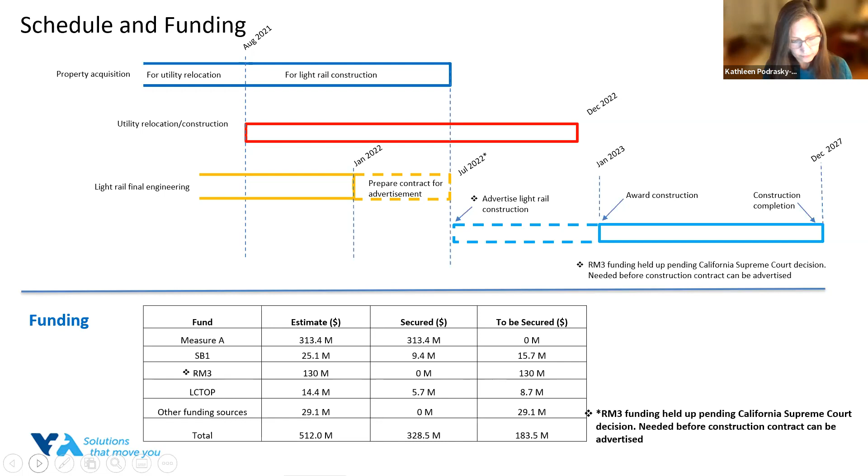This is work to be done by PG&E and San Jose Water Company. We have several communication companies like AT&T, MCI, Comcast, Crown Castle, and Zayo planning to relocate for this project. PG&E is taking the lead in working on the joint trench, which is a combination of utilities that goes into one trench. This makes it more efficient, maximizes productivity, and also minimizes impacts. PG&E is coordinating with other utilities to do this joint trench, where other conduits would share a trench. It's in the design right now, and very soon it'll be out for construction.

Like I said earlier, the final engineering is complete. We are getting the contract package ready for advertisement, and our target is to have this ready by July of 2022. You'll probably see an asterisk there—this is because we need about 130 million of RM3 funds, something we mentioned in previous meetings, that is held up in the California Supreme Court. We're hoping there will be some kind of decision by then, but we don't control the schedule of the court. As soon as we have a decision, only then can we advertise this project—that's why you see an asterisk there.

So we'll be ready with the contract package, and as soon as we hear a decision from the California Supreme Court, we will proceed with advertising the project and then construction. As far as the funding, it's estimated to be 512 million, and we still have to secure about $183 million for the project to proceed with construction.

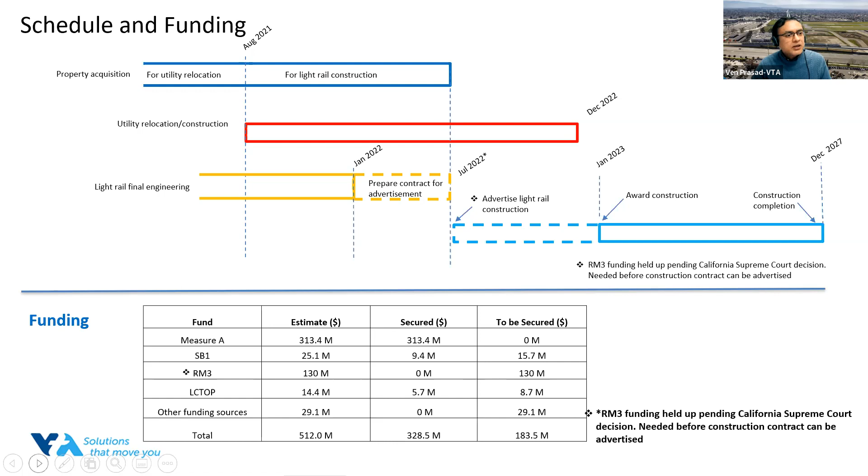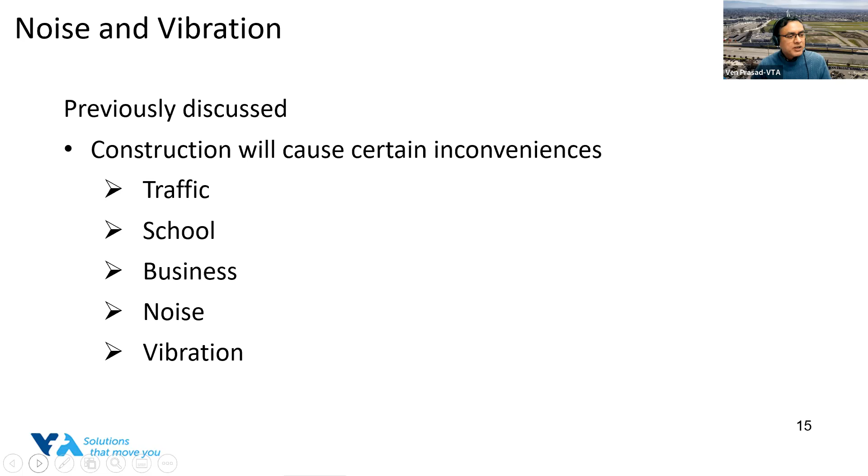Next slide, please. In the previous meetings, the last 3 or 4 meetings, we've been covering many topics of interest to the public, the traveling public, and the neighborhood. We covered traffic before, we covered schools, business, noise, and vibration. The last couple of meetings we covered in detail noise and vibration, the mitigation, and what we've done and are planning to address during construction. These are all things we shared with you, and we're hoping you would share that with your group and let them be informed.

Next slide, please. In the previous meeting, I talked to you about both noise and vibration and the criteria that's been established, and who's responsible for establishing the criteria. We follow the Federal Transit Administration, or FTA's, criteria for managing construction and construction-related noise. A thorough analysis was done as part of the environmental document, which is on our website, covering the analysis done for noise and vibration.

These are the mitigations we're going to be following during construction. Our goal is to minimize the impact, whether it's traffic, noise, or vibration. We want to make it as little a problem as possible. So that is our goal, and we are working to have those impacts minimized.

In the last meeting, you may remember these maps we shared with you. What you see in red are all the readings there. These are called PPVs, or peak particle velocity. FTA has a criteria.

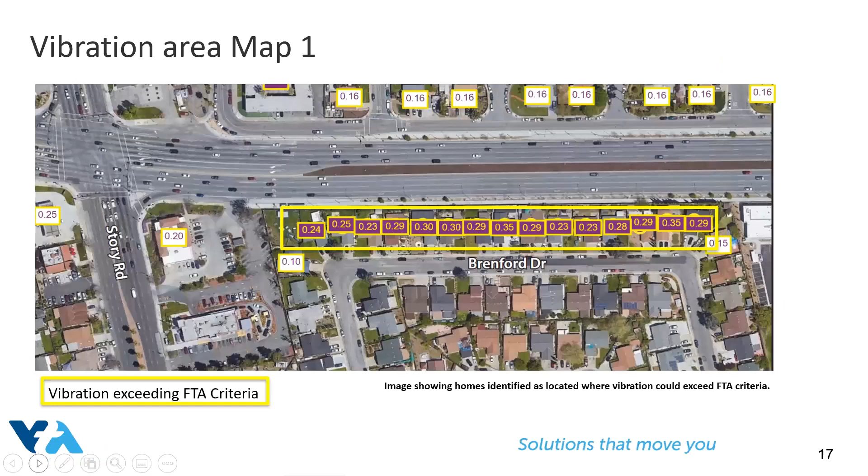Where is that location on the left? I don't recognize it right away. Is that Swift or something like that? Yes, it's at Swift and Capitol Expressway.

Now, one thing I want to point out is I don't know what this gentleman in the hole was doing. I see the little shoring right there, but he's on his knees in a hole that's probably 8 feet deep, and 1 cubic yard of dirt falling on him would suffocate him. So I would hope you guys would make sure your contractors have complete shoring around these trenches.

I don't think that's enough. That cubic yard weighs as much as a car, according to OSHA, and you guys will never get them out of there in time. Do you see what I'm saying? I'm just telling you, I have OSHA 10, OSHA 30, OSHA 500 training. I could teach safety, and as far as I'm concerned, that guy's looking to die.

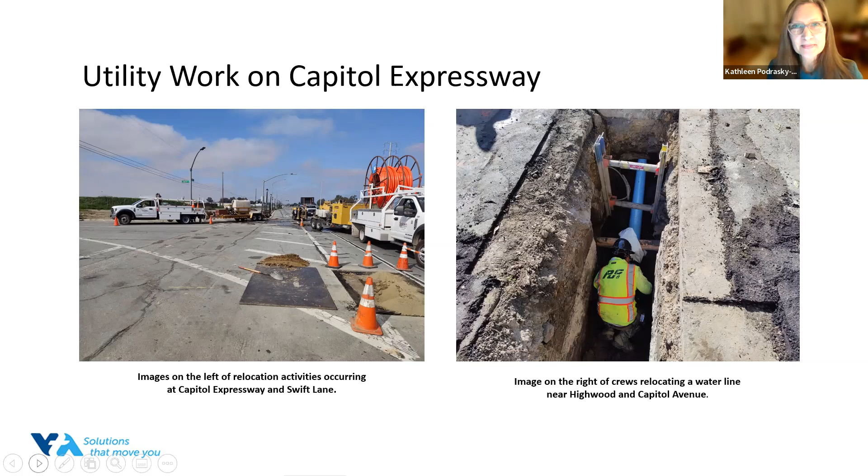Sandy, let me unmute you, unless you can unmute yourself. Kathleen, I wanted to ask, will all the nearby residents get a postcard notifying them about the upcoming meetings, especially the ones that are Spanish speaking? Yes, once we get the dates nailed down, I'll notify about both dates on one notice.

It will be translated. I will be reaching out to all of you to also help broadcast it and reach out to your network, but definitely it will be mailed. I know that's really important for a lot of the neighborhoods that don't have internet, Nextdoor, but it will also be on the website, I'll do the Nextdoor posting and the stakeholder posting, but definitely it will be mailed. Okay, thank you.

You bet. I'm looking forward to getting that nailed down, the date nailed down and the facilitator online, and it's going to be a neat, fun experience. It's a fun part of the project.

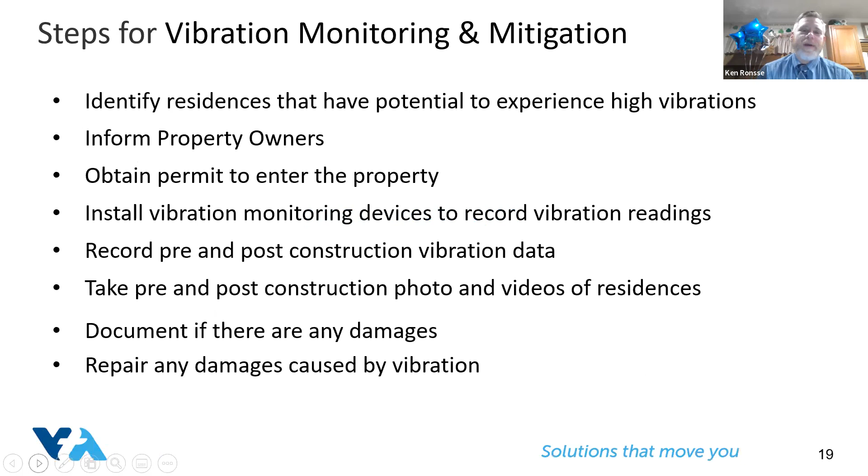Okay, so if we go back to the previous slide, maybe David, if you have the slides. So what we're going to do is request access to all the properties that are the first house along the corridor. Those are the only houses that were identified within the criteria.

What we're going to ask is, can we have access to your property so we can do a survey on the outside and inside? We cannot force our way in, nor will we force our way in. If property owners do not want us accessing their property, then we respect that. But having information will allow us to have a baseline so that, during or after construction, if the property owner were to call us and file a claim, we will give you claim forms that say fill this out if you believe there's any damage, and we would use the existing information to do an analysis to determine if we caused impact.

If there was no impact before and there were cracks after, we're going to fix it. That's our commitment, that we're going to make it right. But it does help us to have good information.

Some of the properties outside, we're not going to go survey. If they're not shown here as the first row of properties, we're not going to survey all the properties in all the neighborhoods because we don't see that as an impact in our analysis. For those houses in the yellow square, we're going to send a letter and have a real estate agent go out and say, please give me access to your property.

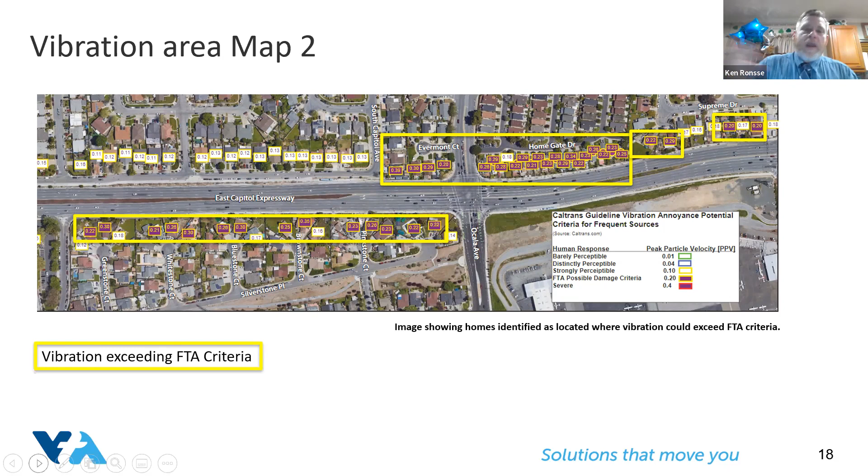Sign this to let me go in your property. We're going to have one of our experts go in and evaluate the walls, the corners, the cracks, take pictures to see what's there today. We expect to see nothing today. We hope every building is perfect inside and out. And then we'll have a baseline, so that later on if that property owner says, I see cracks now, they'll notify us, we'll compare it to before, and then we have something to correct.

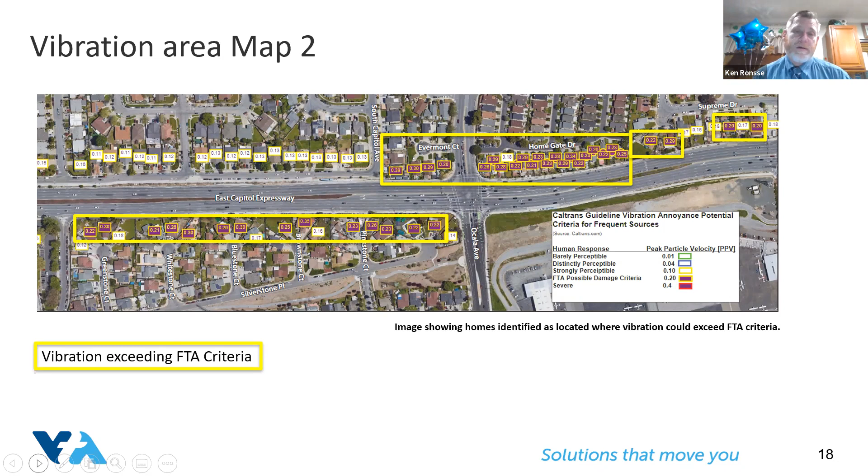Yeah, because it's nothing to do with this, but I have a bad experience at my house. Next door neighbor built another house in the backyard, and for the drain, the water going to the city, they made a hole right there, one foot from my fence, and all my paint and all one side has cracks all over. I talked to him, and he said, okay, I don't know how the house was before, and my fault was because I don't have experience with that. I was supposed to take pictures before they started construction and after, because it's just one side of my house.

Right, and I could totally appreciate that. You don't have evidence from before to show how their work caused the impact. So our goal is to get access to all of these properties. And even if a property owner does not allow us in, we'd like them to take pictures of their own property beforehand, so that we can show it.

Because our responsibility is to correct any problems, we are not going to shy away from correcting problems. We do want to make sure we're not correcting existing problems, right? If there's cracks today, we don't want to go fix those. But if we cause them, we are absolutely going to correct it. That's our responsibility.

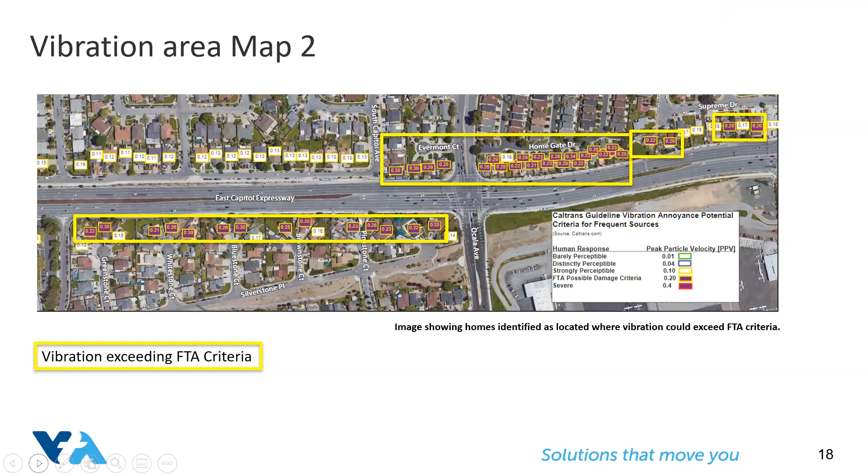Okay, so that was my question. Is that going to be a stop in Ocala? There will, at this time, there is no stop at Ocala. The last environmental document showed there was not enough ridership at Ocala, so Ocala was deleted.

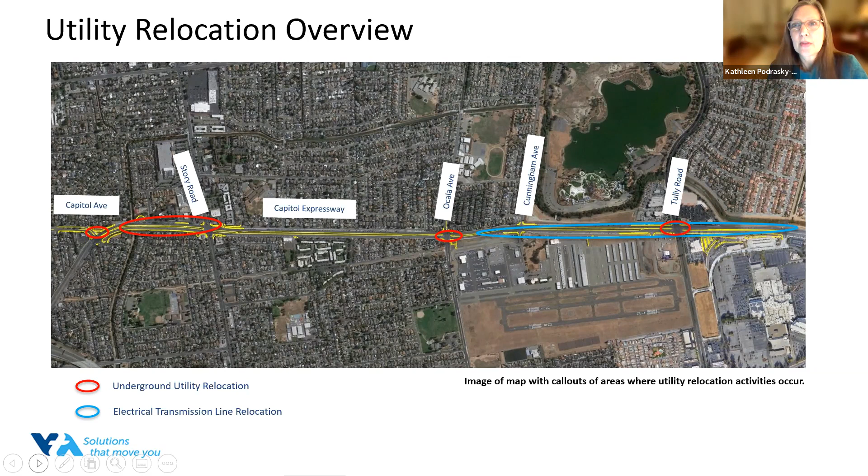Okay. Are any other stakeholder members want to pipe in? This is a good time. Any attendees, any more questions?

So like I was mentioning earlier, we have a board of directors meeting next week. I don't believe this project is on the agenda, but it's always a good time to check in and hear what else is going on. And then the Eastridge to BART Policy Advisory Board meets on March 16th at 4 p.m. That is virtual, and I'll show you on the next slide, but sign up for updates. I also have a note in my calendar to remind everybody it's happening as well.

There was some questions about some of the airport analysis for soil and that kind of thing. So we're setting up a meeting with Hope through Cindy Chavez's office to talk with our geologist who did the calculations, to explain it to the group and what the findings were, and then what we're doing during construction whenever we're going to be excavating.

So look for that, Danny. She's going to be setting that up. Hope will be setting it up with our architect, our environmental team, and our geologist, to describe what findings we did, but more importantly, what we're going to be doing during construction of light rail. So that's coming up - when we have construction we're going to be doing sampling and testing in reaction to what we find before we do excavation during construction. I wanted to say that so that we weren't silent here, so that Danny knows that we are going to set up that meeting and we've offered to have our geologist and design team there, and Hope is going to be setting that up. So just wanted to share that information.